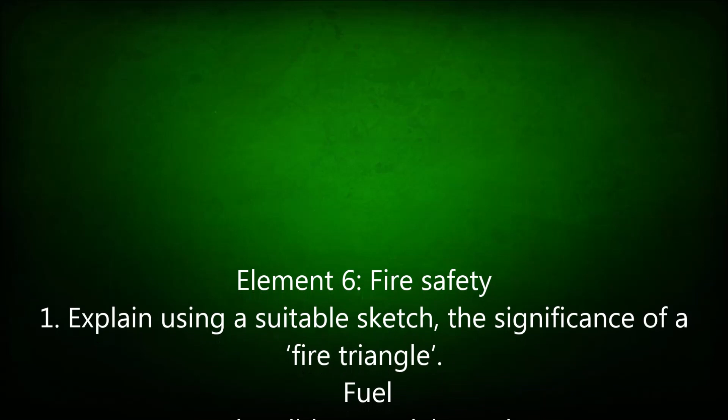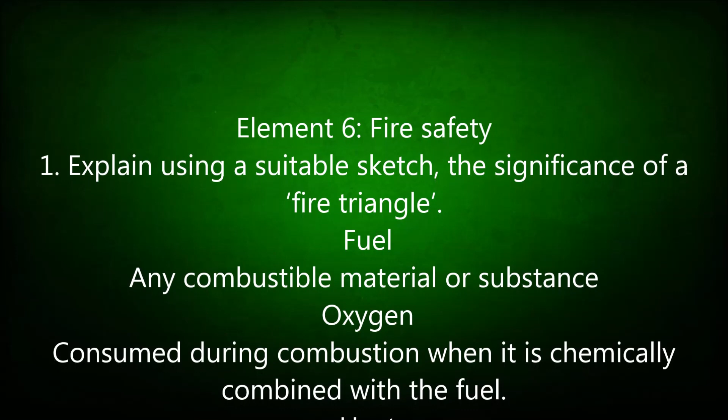Fuel: any combustible material or substance. Oxygen: consumed during combustion when it is chemically combined with the fuel. Heat: a heat or ignition source is essential to start the combustion process.

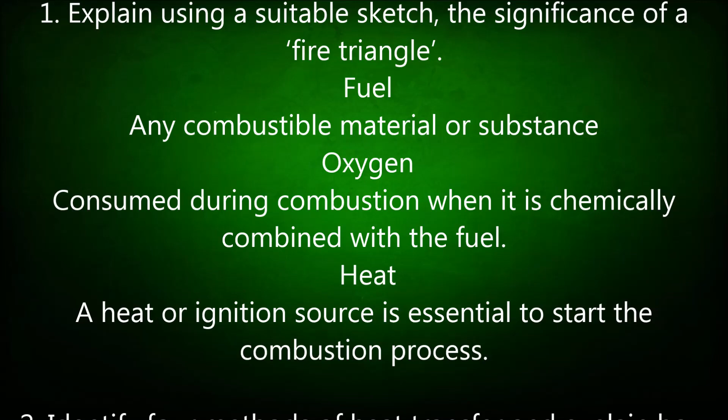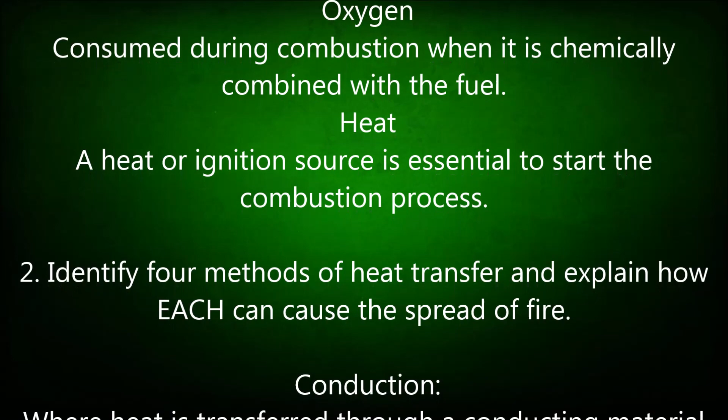Question 2: Identify 4 methods of heat transfer and explain how each can cause the spread of fire. Conduction: where heat is transferred through a conducting material, for example metal, without the conductor itself burning.

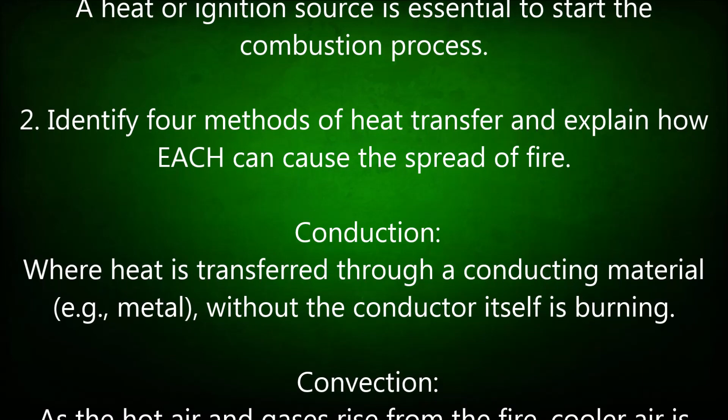Convection: as hot air and gases rise from the fire, cooler air is drawn in which, in turn, is heated and rises. This continuous process of air being drawn in, heated, rising, cooling and descending forms circulating currents which enable the fire to spread.

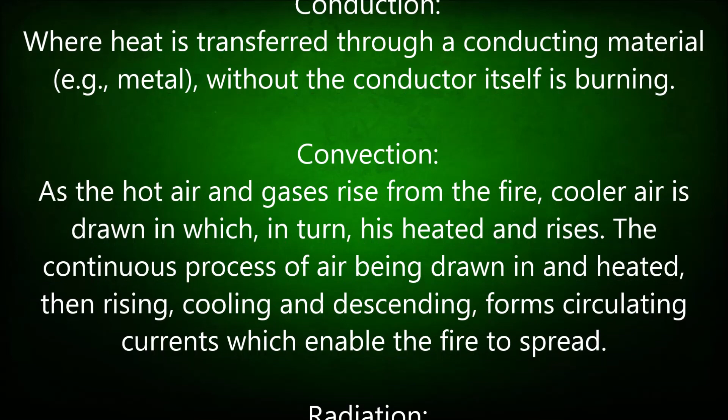Radiation: heat energy from the fire, in the form of infrared radiation, is transmitted through the air and may be absorbed by other fuel sources, causing them to heat up, possibly enough to cause ignition. Direct burning: combustible materials in direct contact with naked flame.

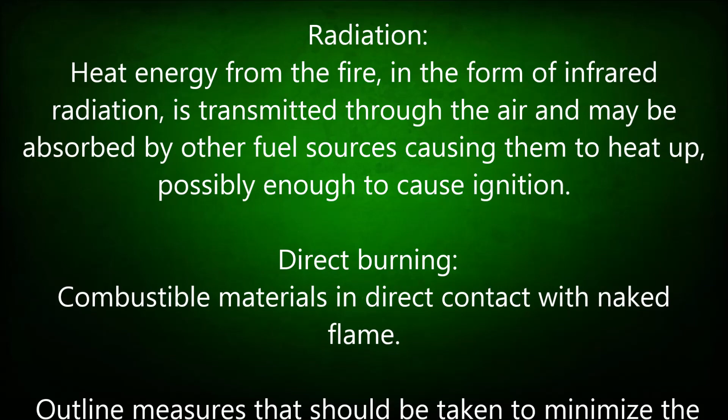Outline measures that should be taken to minimize the risk of fire from electrical equipment. Measures such as proper selection of equipment to ensure suitability for the task, pre-use inspection by the user, establishing correct fuse ratings, ensuring circuits and sockets are not overloaded, disconnecting or isolating equipment when not in use, and ensuring electric motors do not overheat, for example by checking that vents are uncovered.

Additional measures include the need to uncoil cables, particularly extension leads, to prevent the buildup of heat, and protecting cables from mechanical damage. Electrical equipment and systems should be subject to regular inspection, testing and maintenance by competent persons, ensuring for instance that contacts are sound, thereby reducing the likelihood of electrical arcing.

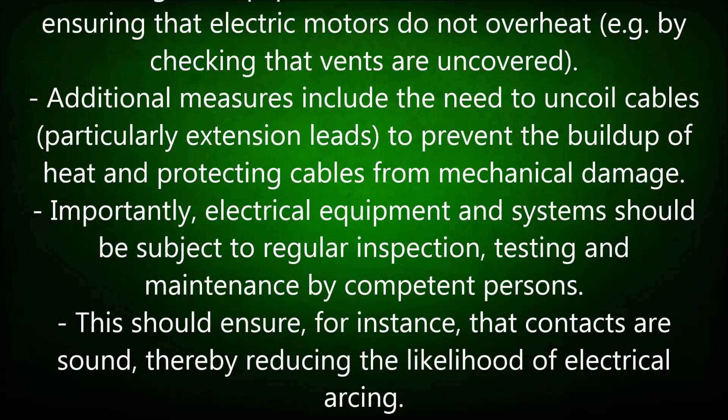Question 4: List 8 ways of reducing the risk of a fire starting in a workplace. Flammable materials are removed from the work area. Items that cannot be removed are covered with fire retardant blankets.

The floor is swept clean. Any wooden floor is damped down. A suitable fire extinguisher is at hand. A fire watcher is present in the area. The work area is visited routinely after the work has finished to check the area for smoldering.

Ensure that the workplace is well ventilated. Store and use required minimum volume only. Use away from heat and ignition sources.

Question 5: List the 5 steps in doing an assessment on fire risks. Identify the fire hazards: sources of fuel, ignition, oxygen. Identify the people who might be harmed: people in the premises and special consideration to vulnerable people.

Identify and implement the fire precautions that are required: fire prevention, prevention of the spread of smoke and flames, fire detection and alarm, means of escape, signs and notices, lighting. Record findings, plan and train. Review and revise the assessment as necessary.

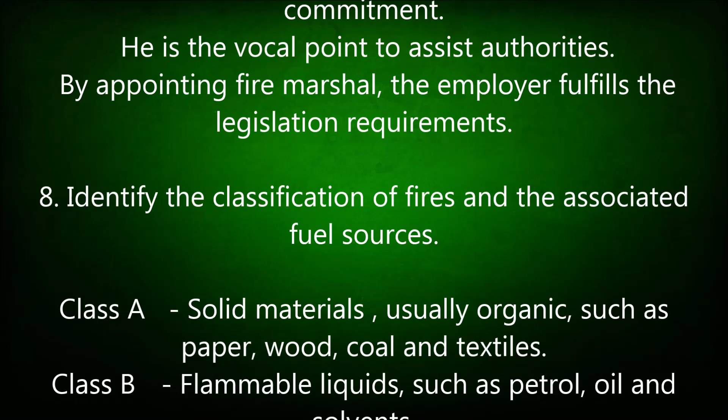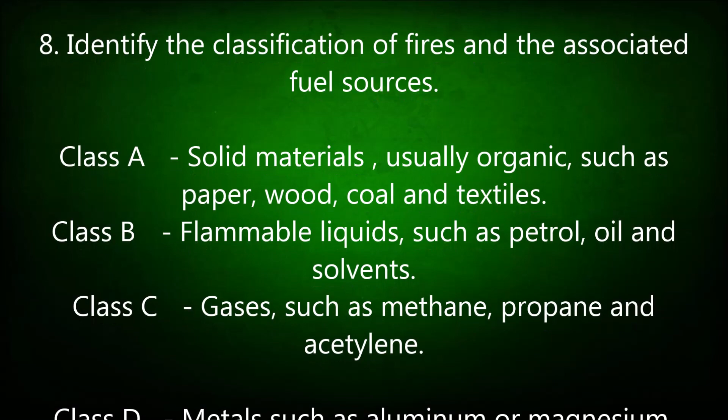Identify the classification of fires and the associated fuel sources. Class A - solid materials, usually organic, such as paper, wood, coal and textiles. Class B - flammable liquids, such as petrol, oil and solvents. Class C - gases, such as methane, propane and acetylene. Class D - metals such as aluminium or magnesium. Class K - high temperature fats and oils, such as cooking fat fires.

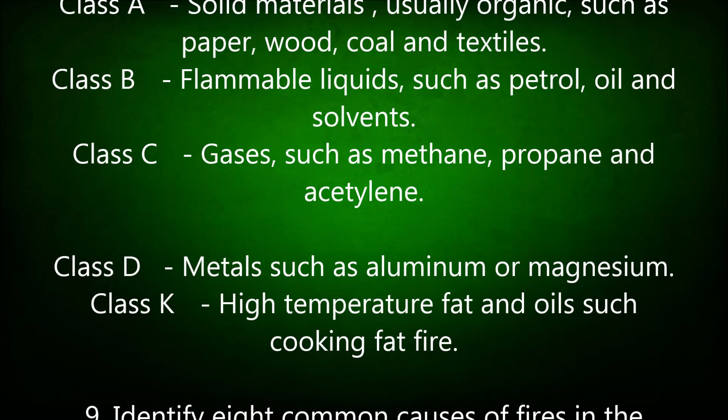Identify common causes of fires in the workplace: careless actions and accidents; discarded lighted cigarette end or match; smoldering waste; poor electrical connections; overloading electric circuits and using fuses of too high a rating; failure to report and repair faulty equipment promptly; defective machinery or equipment; deliberate ignition.

With respect to the design features of a building: identify types of emergency warning systems that can be installed to help ensure that all workers can be made aware of the need to evacuate. These include interlinked smoke alarms, automatic fire alarms, smoke detectors, heat detectors, and hazard warning lights.

Outline structural measures that can help to prevent the spread of fire and smoke.

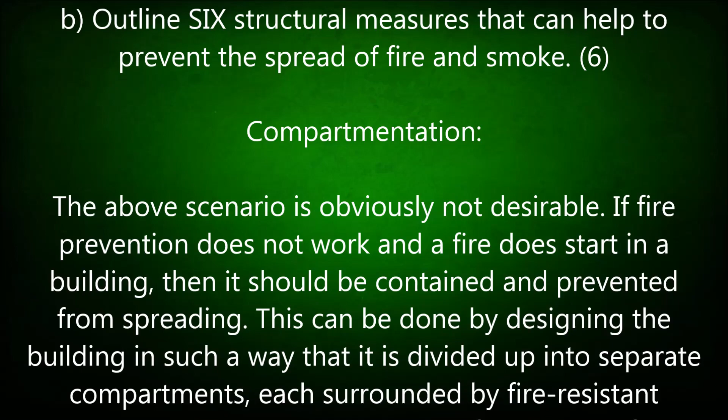Compartmentation: the above scenario is obviously not desirable. If fire prevention does not work and a fire does start in a building, then it should be contained and prevented from spreading. This can be done by designing the building so that it is divided into separate compartments, each surrounded by fire-resistant materials that can resist the spread of smoke and flame. This compartmentation is done at the initial design and build stage but may also have to be done if a building is changed or modified. This is normally a heavily legislated issue subject to strict control and local standards.

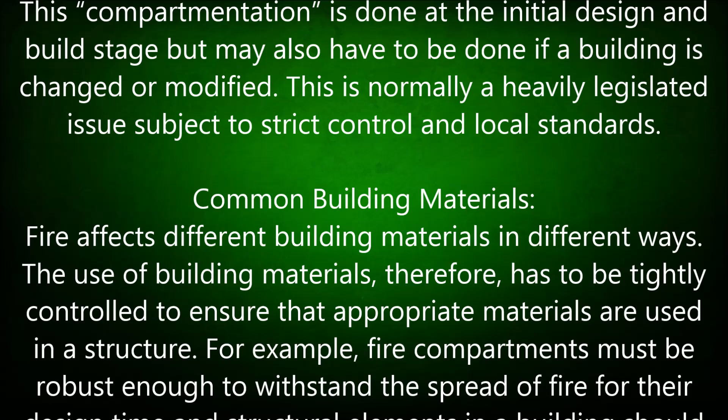Common building materials: fire affects different building materials in different ways. The use of building materials has to be tightly controlled to ensure appropriate materials are used in a structure. For example, fire compartments must be robust enough to withstand the spread of fire for their design time, and structural elements in a building should not fail quickly when heated in a fire. There will be local regulations and standards to ensure fire safety.

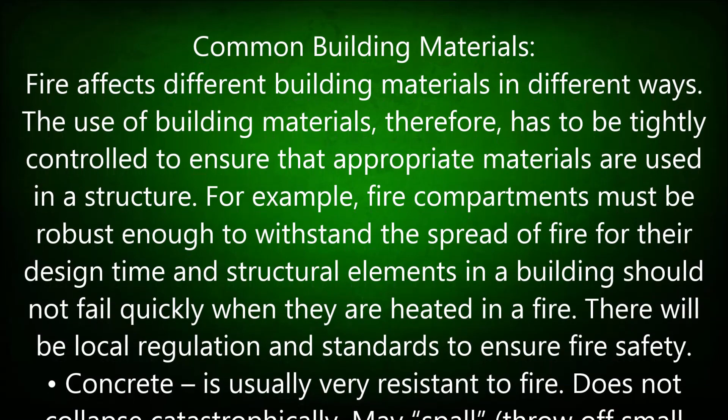Concrete is usually very resistant to fire. It does not collapse catastrophically, though it may spall and throw off small chunks.

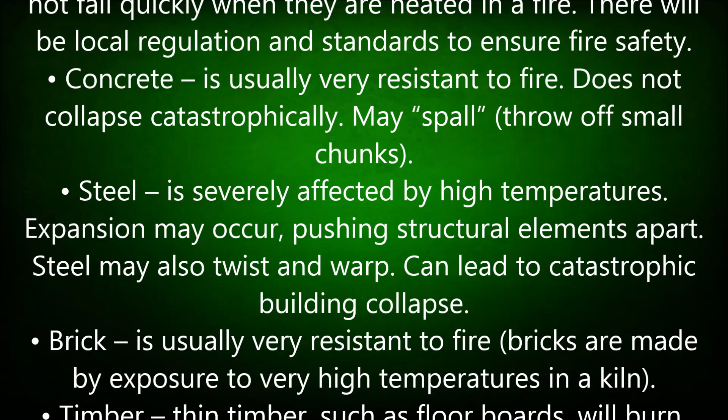Steel is severely affected by high temperatures. Expansion may occur, pushing structural elements apart, and steel may also twist and warp, which can lead to catastrophic building collapse.

Brick is usually very resistant to fire. Bricks are made by exposure to very high temperatures in a kiln.

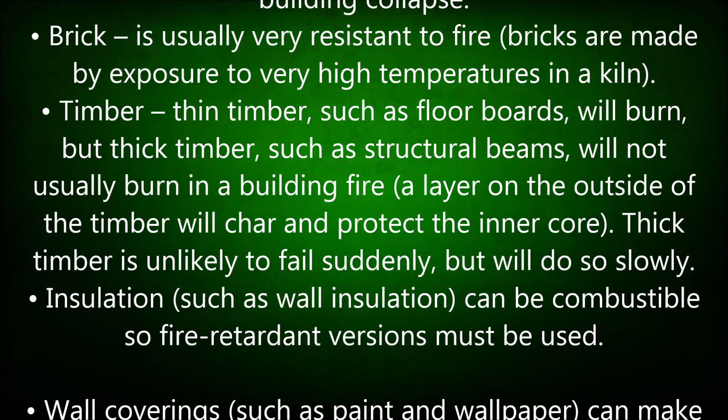Timber: thin timber, such as floorboards, will burn, but thick timber, such as structural beams, will not usually burn in a building fire. A layer on the outside of the timber will char and protect the inner core, so thick timber is unlikely to fail suddenly, but will do so slowly.

Insulation, such as wall insulation, can be combustible, so fire retardant versions must be used. Wall coverings, such as paint and wallpaper, can make a difference to the way fire spreads across surfaces, so should also be closely controlled.

Protection of openings and voids: fire doors are used to ensure that door openings are protected in the event of fire. However, buildings, and the fire compartments they are made up of, will inevitably have numerous voids and openings running through them, such as lift shafts, service conduits, air handling ducts, voids between floors, roof voids, etc. All of these need to be protected to ensure that smoke and flame cannot easily travel from one compartment to another.